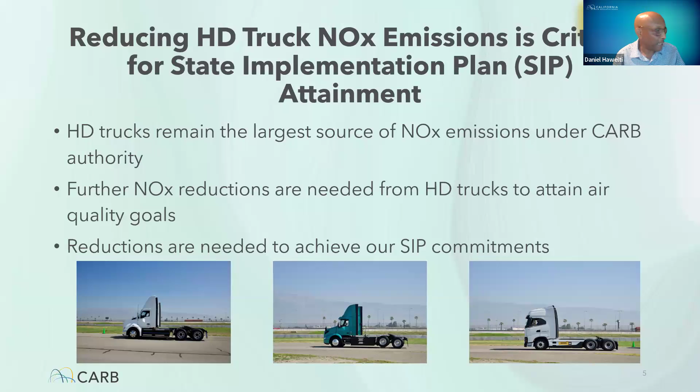The table shows a comparison of the major elements included in the Omnibus regulation and EPA's NOx rule. First, there is a difference in the applicability of the two regulations. The Omnibus applies to 2024 and later model year engines used in vehicles greater than 10,000 pounds, while EPA's NOx rule applies to 2027 and later model year heavy-duty engines used in vehicles greater than 8,500 pounds. Both regulations apply to spark-ignited and compression ignition heavy-duty engines.

Both regulations modify the same regulatory elements, including similar certification test cycles, and corresponding standards that are similar with slight differences. Both programs modify the averaging, banking, and trading program, the warranty period, and the useful life periods. Both regulations also modify the in-use testing program and use the moving average window methodology for analyzing emissions. Next slide.

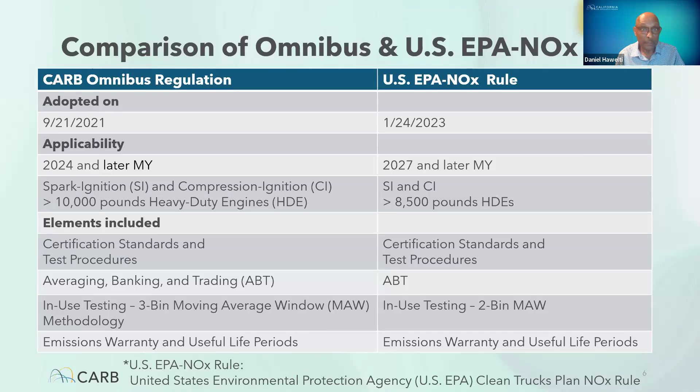In this workshop, in general, staff is proposing to largely align with the US EPA NOx rule for 2027 and later model years. However, CARB will maintain its own certification program, its own onboard diagnostic program, its own emission warranty information reporting program, and its own heavy-duty in-use testing program, except for aligning with EPA's two-bin moving average window methodology, as well as the off-cycle standards as agreed in the partnership.

CARB will also maintain its clean idle requirements as a mandatory requirement, as opposed to EPA's voluntary requirement. Next slide.

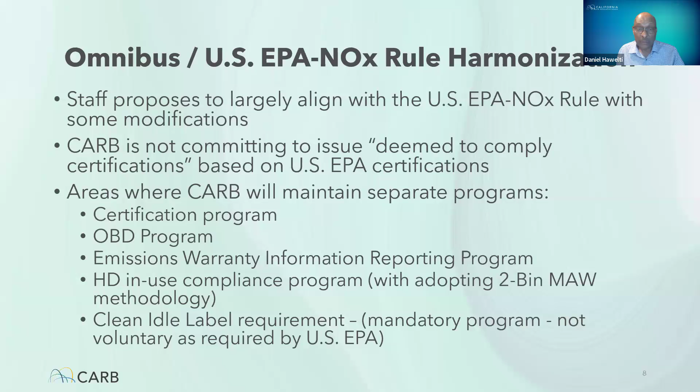Staff is proposing to align the Omnibus certification standards for 2027 and later model year engines with the federal certification standards for both compression ignition and spark ignition engines. For compression ignition engines, standards are based on existing certification test cycles such as the FTP and the SET, and a new low load cycle intended to address low load operations. For spark ignition engines, standards are based on the existing FTP duty cycle and a new SET duty cycle intended to address high load operations.

In addition to NOx, EPA also established reduced standards for particulate matter, hydrocarbons, and carbon monoxide. Staff is also proposing to align with these standards. Next slide.

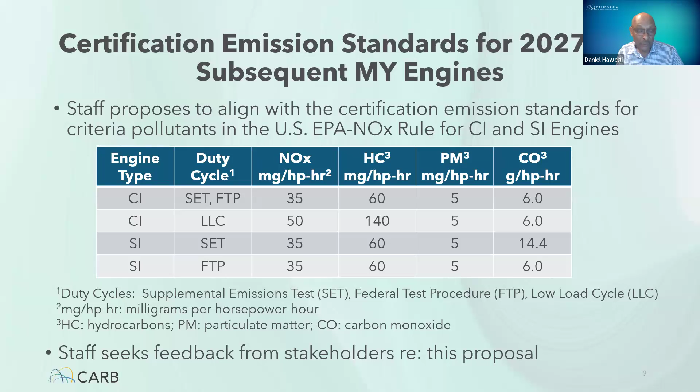Next is a durability demonstration program. Manufacturers are required to demonstrate that the engine and after-treatment system will meet applicable standards throughout their regulatory useful life. Staff is proposing to align with the durability demonstration provisions in the EPA rule.

This would include the method for determining deterioration factors for new engines, which would include dynamometer aging of the engine and after-treatment system for a fraction of the useful life, and accelerated bench aging of the after-treatment system for the remainder of the useful life.

Additionally, the program would require manufacturers to verify the deterioration factor, or DF, in use using engine dyno testing or portable emissions measurement system, or PEMS testing. Currently, Omnibus requires manufacturers to submit in-use emissions reports for DF verification. For 2027 and later model year engines, manufacturers would no longer be required to submit these in-use emissions reports. Next slide.

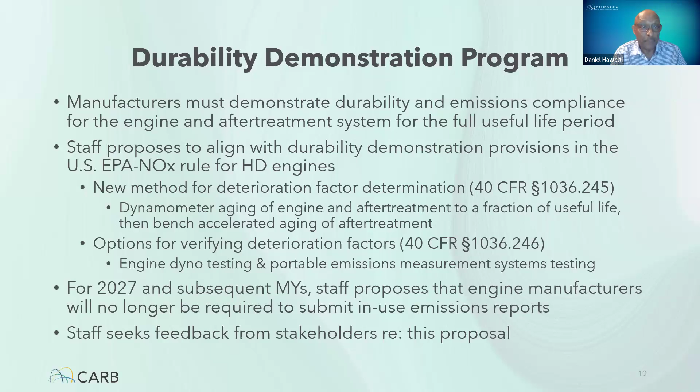The averaging, banking and trading program provides manufacturers with flexibility in their product planning, while also encouraging the early introduction of emission control technologies. Starting with the 2027 model year, staff is proposing to merge the California ABT program with the federal ABT program, and also allow the use of credits accrued under the federal ABT program to certify 50-state engine families in California. The proposed NOx family emission limit caps are 65 milligrams for model years 2027 through 2030, and 50 milligrams for model years 2031 and later. Additionally, credit accrual from zero emission powertrains would not be allowed for 2027 and later model year engines. Also, there would not be an ABT program for hydrocarbon, CO, or PM for 2027 plus model years. It means that for these pollutants, manufacturers have to certify to the standards.

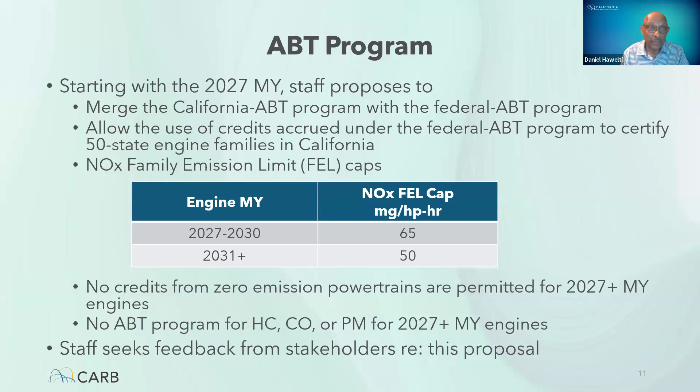Moving on to the useful life. The useful life period is the period for which the engine must remain emissions compliant. Staff is proposing to align with the useful life values for mileage, years, and hours in the federal NOx rule for 2027 and later model year engines. For heavy engines, the useful life, which is 650,000 miles shown in the table, is a period that the engine should remain compliant with the standards when the vehicle is operating in the real world. However, manufacturers are required to demonstrate durability at certification for a longer useful life of 750,000 miles, intended to ensure that the final standards will be met throughout the shorter useful life of 650,000 miles when these engines are operating in the real world.

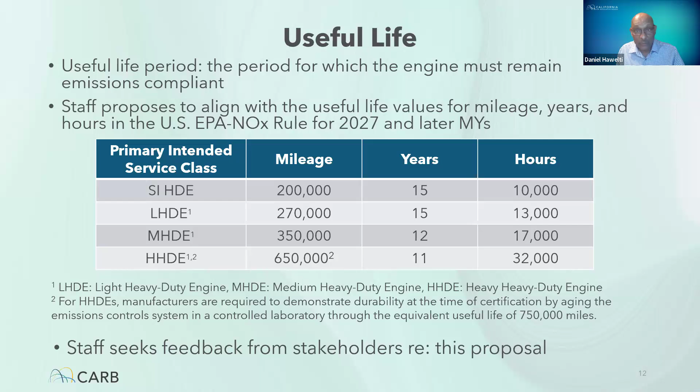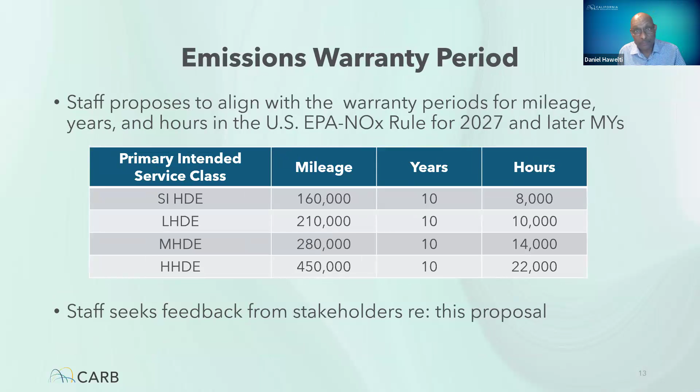Moving on to the in-use standards, staff is proposing to align with EPA's two-bin moving average window methodology and off-cycle standards for 2027 and later model year engines. Emissions are collected using PEMS when the vehicle is operated in use, and then analyzed using 300-second moving average windows each second. Window emissions are then placed into a bin depending on the type of operation. Bin 1 represents window emissions at idle or at very low load operations, and bin 2 represents window emissions for low, medium, and high load operations. Staff is also proposing to align with the PEMS accuracy margin, which is equal to 0.4 gram per hour for bin 1 and 5 milligram per horsepower hour for bin 2.

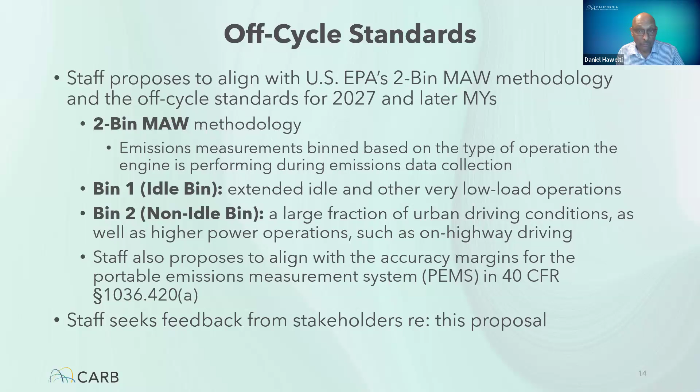Continuing with the in-use standards, staff is proposing to align with EPA's 15 milligram per horsepower hour interim compliance allowance applicable for bin 2 off-cycle standards for medium-heavy and heavy duty in-use engines. However, there are differences between CARB and EPA's applicability of the margin. For EPA, the interim compliance margin is permanent, applicable for 2027 and later model year engines. For CARB, the provision would sunset in 2035. This proposal is based on the partnership agreement signed between CARB and the industry.

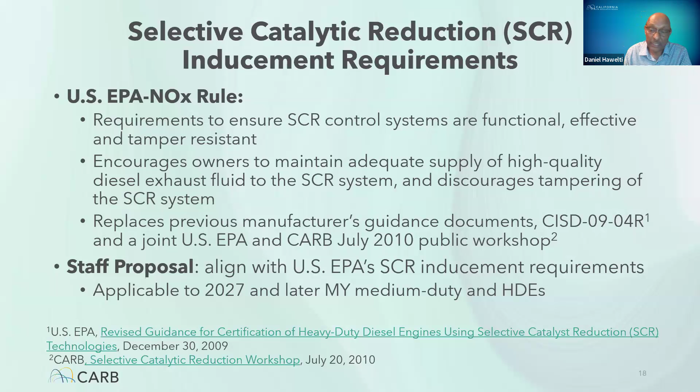Currently, California transit agencies can purchase transit buses equipped with federally certified engines instead of Omnibus compliant engines. Since CARB is proposing to align with the federal requirements starting with the 2027 model year, there would be no need for this exemption. As a result, staff is proposing to sunset this exemption starting with the 2027 model year engines. This concludes my presentation.

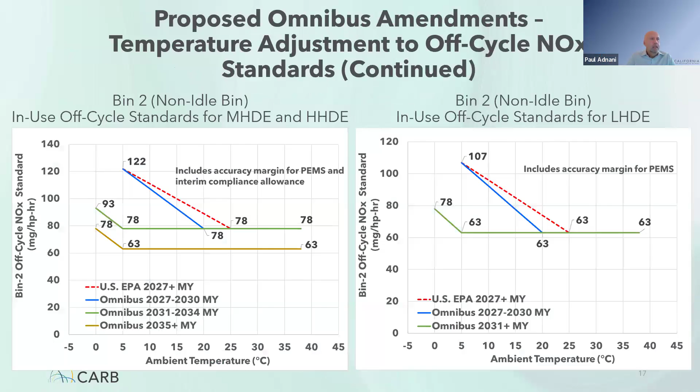Well, the question is, they're not very sensitive to temperature. Yes, until 20 degrees C, but after that, as you see, the standards do go up. And these are the ambient temperatures, by the way. So depending on what the average ambient temperature is for the test day, you're going to have a different set of standards. I'm just looking at the green line - go back to the previous one. It looks like between 5 to 0 degrees C, the standard goes up by almost 20%. So whether you want to call that very temperature sensitive or not, to me it is.

Thank you, Paul. Our next question comes from Tom Croissant. Will NZEVs broadly fit into the same emissions requirements as shown in the table, and enable potential hydrogen to ICE hybrid and/or natural gas RNG engines to still participate in ABT generated credits?

So first thing I want to say is that NZEV is not a term that is defined in Omnibus. I presume you're referring to hybrids. I can go through each one at a time. Hydrogen internal combustion engines - yes, whether they would fall under the spark ignition or compression ignition category, yes, they would be subject to the same emission standards that were shown to you. Same thing with natural gas and RNG. Hybrids, I guess, have various pathways - you could either certify the engine or certify the hybrid powertrain. But yeah, under those, they would be subject to the same standards that were shown to you.

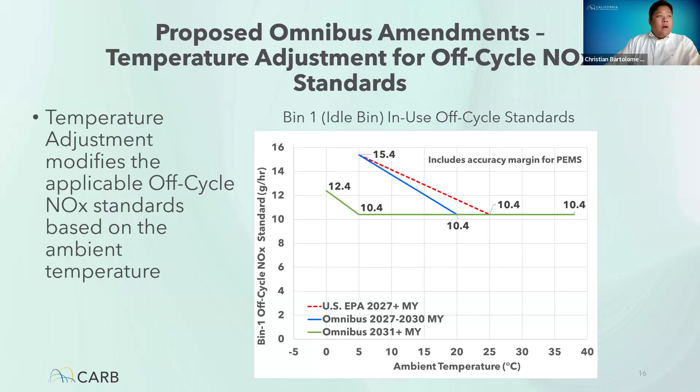Our next question is related to slide 15. Is slide 15 related to the off-cycle slide 14? Yes and no. They apply to in-use standards. The interim in-use compliance applies to off-cycle standards, but it also applies if you take an in-use engine, take it off the truck, and put it on a dyno in the lab. That is still considered an in-use engine, so the compliance allowance would apply to lab testing in that scenario as well.

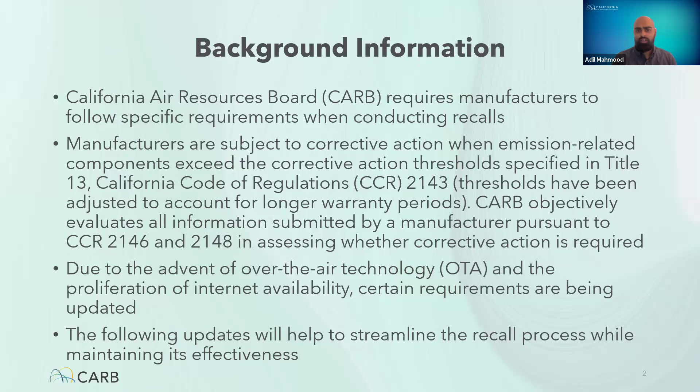Due to the advent of over-the-air technology and the proliferation of internet availability, certain requirements are being updated. In this presentation, I will go over updates to the requirements that will help streamline the recall process while maintaining its effectiveness.

The first update is to the recall repair label requirement, currently required by California Code of Regulations sections 2116, 2128, and 2169.3. These labels indicate that a recall repair has been made to an engine. Currently, manufacturers are required to affix a recall repair label to vehicles after a recall repair has been completed. If a vehicle is repaired over the air, manufacturers must mail a recall repair label along with instructions on how to affix it to the vehicle owner.

The proposed update will exempt manufacturers from the recall repair label requirement if certain conditions are met. First, the recall must only involve a software change, not hardware. Second, the manufacturer must keep a record of VINs for all vehicles inspected or repaired. Lastly, upon request from the executive officer, the manufacturer must provide information about running changes, field fixes, service campaigns, and recalls for any given VIN from all vehicles affected by the nonconformity. Engine serial numbers cannot be used in lieu of VINs, because the DMV system requires VINs for recall registration holds.

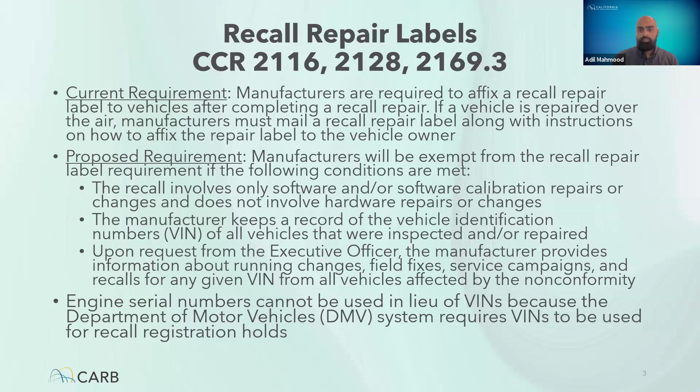Another update will be to the proof of correction certificate requirement. These certificates are provided to vehicle owners after a recall repair has been completed and can be used to have a recall registration hold removed by the DMV. Currently, for over-the-air recalls, during the first 6 months manufacturers must mail a hard copy proof of correction certificate or provide an electronic copy to owners who had the repair performed over the air. The proposed update removes this requirement during the first 6 months for over-the-air repairs. A hard copy must still be provided if the repair is performed after the first 6 months, because the DMV will not accept an electronic certificate to remove a registration hold.

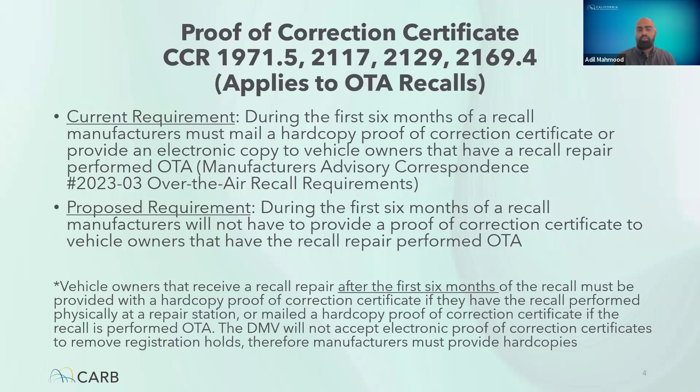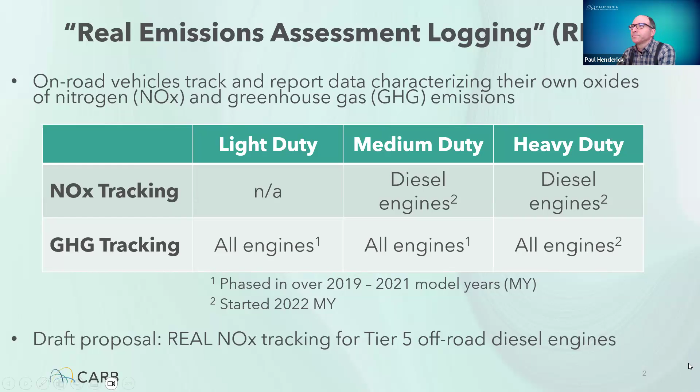What we're going to be focusing on from this point going forward is real NOx tracking. This is actually quite important. The data we get from it provides feedback on our regulatory programs as to how we're doing out there in the real world. It also improves our emissions inventory and serves as a quick screening tool to help flag any potential emissions issues that might be out there.

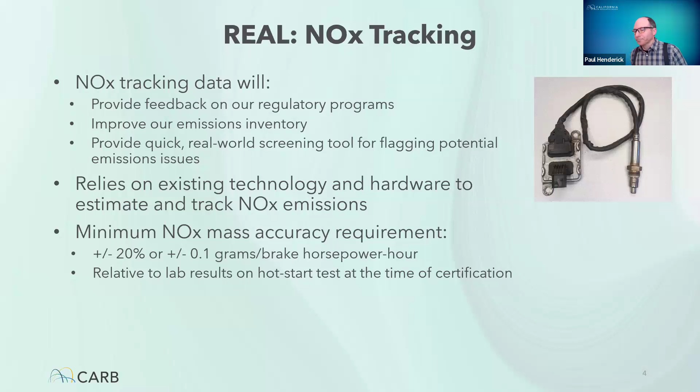We've got a couple of different time frames shown here. The 100-hour arrays capture data that's more current, like within the last 100 hours. The lifetime array is a continuously increasing quantity that represents, as the name suggests, the lifetime values.

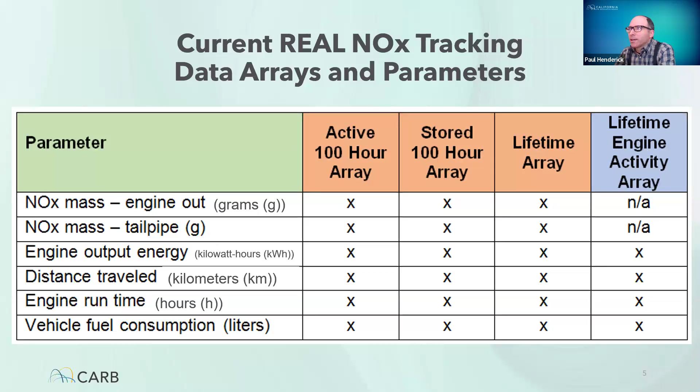These bins also get summed — the total of bin 2 through 14 is stored in bin 1. There are a few special bins off to the right: the not-to-exceed (NTE) bin, the regen bin (DPF regeneration bin), and the MIL-on bin. These store data under special circumstances.

When the not-to-exceed (NTE) conditions are satisfied, bin 15 stores data. When an active regen event is being commanded for the DPF, the regen bin stores data. When a malfunction has been detected by the OBD system and the MIL is illuminated, data is stored in bin 17, and not in the other bins. So if there's a malfunction, the data goes into that bin.

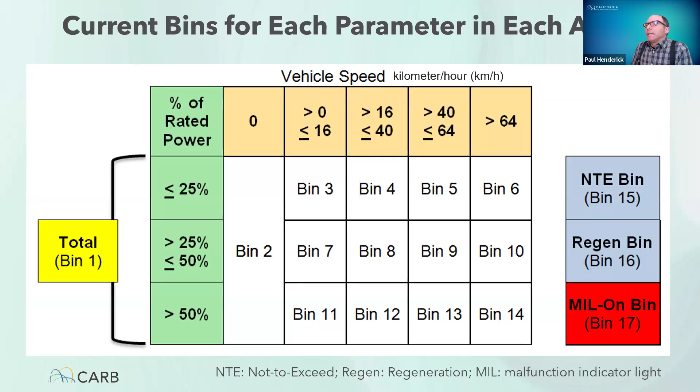Next slide, please. Okay, so that's basically what REAL looks like.

And as you saw, we do have an NTE bin in the current structure to reflect the previous in-use compliance evaluation method. But as mentioned previously, that has changed, and we want to keep up with those changes.

So the low NOx omnibus rulemaking moved from the NTE to the 3-bin moving average window methodology that allows for analysis of idle and low load and higher load operation.

But again, as part of the Clean Truck Partnership, we're agreeing to align with US EPA's methodology, which is only slightly different in this case. Instead of looking at 3 bins, it's 2 bins, both the idle and essentially non-idle operation.

So that's what we're proposing today, is to add these 2B-MAW bins to our REAL structure so that we're aligned. Next slide, please.

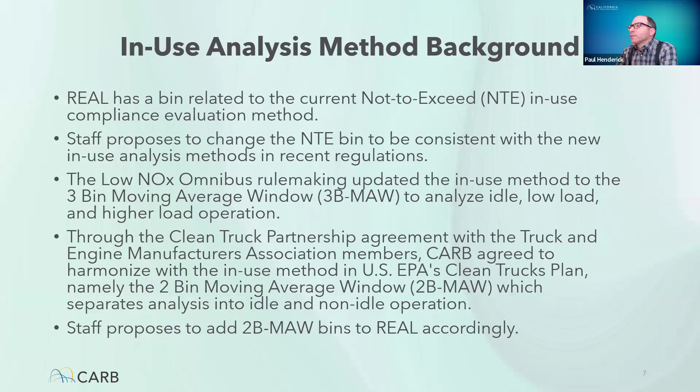Okay, so this slide is showing basically what I just described. So we're no longer going to be using the NTE bin for future engines, and we're going to add these 2B-MAW bins, bin A and B here.

Bin A, the idle bin. When your 300-second chunk of data averages to less than or equal to 6% of rated power, it would be put in bin A. But if the average rated power is greater than 6%, it would be stored into bin B.

I'll add that we want to work with the relevant SAE committees to standardize these changes. And next slide, please.

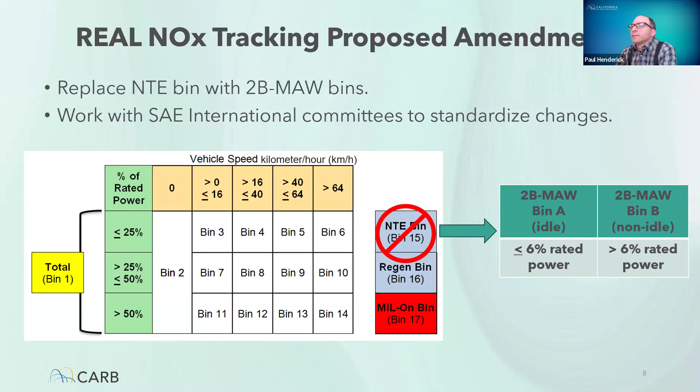One thing that we're sensitive to is the need to economize on the engine control module's resources in terms of memory and processing. And so we're proposing a targeted use of these 2 bins, A and B.

So bins A and B are there for the 100-hour arrays and the lifetime array. And for engine output energy, we would add bin B. That's where we need to get the work term to be able to calculate the gram per unit work values for bin B.

But bin A does not need work for that evaluation, and so we will only need to add bin A for the engine runtime. It's a grams per hour based standard. And then also we're adding bin B for engine runtime to give us a sense for how much time is being spent in one mode of operation versus another, A versus B.

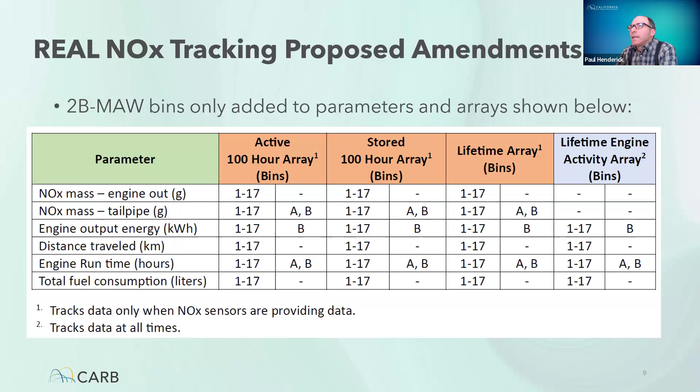Next slide, please. So the goal here, when incorporating 2B-MAW into REAL, is we want to use a methodology that's as close as possible to the methodology that's used when post-processing PEMS data in the actual in-use compliance evaluation method.

So data would be deemed invalid and therefore not included in a 300-second window if REAL tracking is paused for some reason, such as a malfunction detected with the tailpipe NOx sensor, or if the MIL is on for, generally speaking, other types of malfunctions as well. And also if the NOx sensor controller is indicating that the reading is not stable, that could be another reason to not include data in this window.

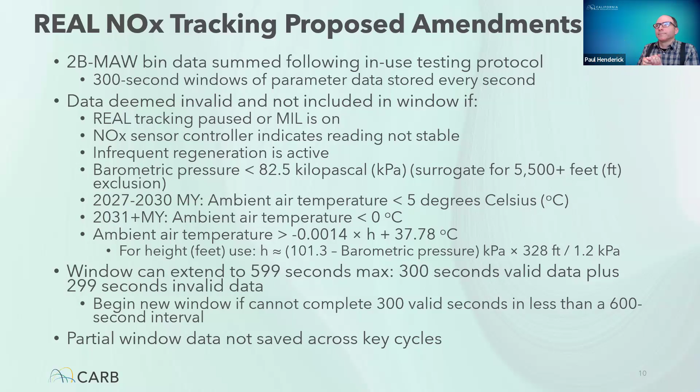And then the second bullet point relates to the 2B-MAW window methodology, basically what I was going over in the previous slide—in the sense that we want to align the methodology employed by the engine control module that's tracking 2B-MAW data as closely as possible with the method used when post-processing PEMS collected data. So we showed you our stab at it, trying to get close, and we'd like to hear your feedback on if there's some area where it can be improved. We'd like to have that discussion. So that is it for me, Christian.

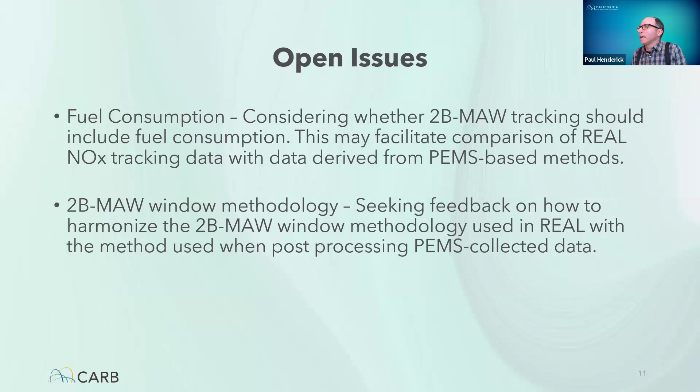I believe Paul wanted to answer. Yeah, that's correct, it is pretty high. Really, those original accuracy requirements were a reflection of older model year engine data, meant to simply reflect, without making any special effort to meet a standard, what trucks would be able to comply with, sort of to keep the performance and accuracy at least what it appeared to be capable of a few years ago.

So, like I said before, we're going to continue to look at data as we get more, to see if we can reevaluate that for future engines. Thank you, okay.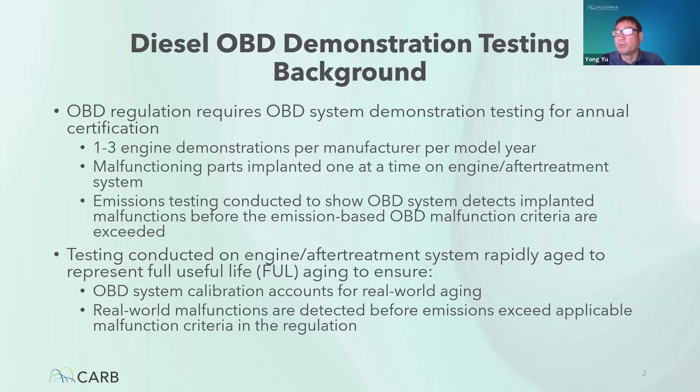Here are the requirements for the complete engine aftertreatment system aging. First, the OBD regulation sets the minimum accelerated aging hours for the complete system, including engine emission controls and aftertreatment. For heavy-duty engines, the minimum hours will be 2,500 hours.

For medium heavy-duty engines, 1,063 hours. For light heavy-duty engines, 632 hours. For the aging process, it must consider the following parameters: operation at rated horsepower, operation at load level greater than 80% of rated torque, with sustained interval at 100% of rated torque.

Operation at transient conditions, for example Mode 2 of the Federal Test Procedure cycle. Calculate the number of regeneration events experienced over the FUL. Thermal cycle events, which means system shutdown with subsequent cold start.

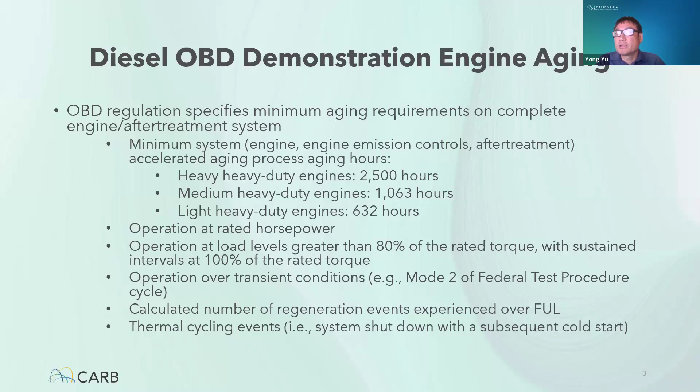Next slide. In addition, the regulation also requires validation of the OBD demonstration engine aging process against an actual FUL in-use engine, to ensure this aging process is representative.

Validation must include the following metrics of the FUL: fuel burn rate, total fuel consumed, and reductant used by the system. The validation also includes the correlation between a representative actual FUL system and the test engine's adaptation learning parameters used to maintain emission control performance to the applicable emission certification standard over the life of the system. Next slide, please.

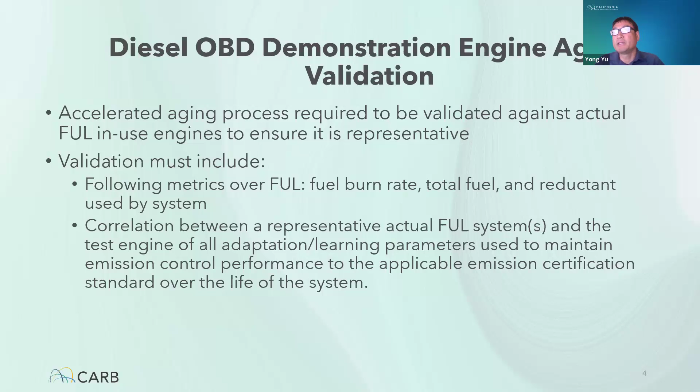US EPA and CARB have emission certification engine aging protocols, but they serve a different primary purpose than OBD demonstration testing. The aging and deterioration factor is used to ensure the engine will meet emission standards throughout the useful life.

The difference between US EPA aging versus CARB's OBD demonstration aging includes the fewer hours of aging on a complete system, meaning engine plus after-treatment for heavy-duty engines. The US EPA DF aging allows accelerated bench aging for the after-treatment device, including accelerated chemical exposure, including lube oil and sulfur.

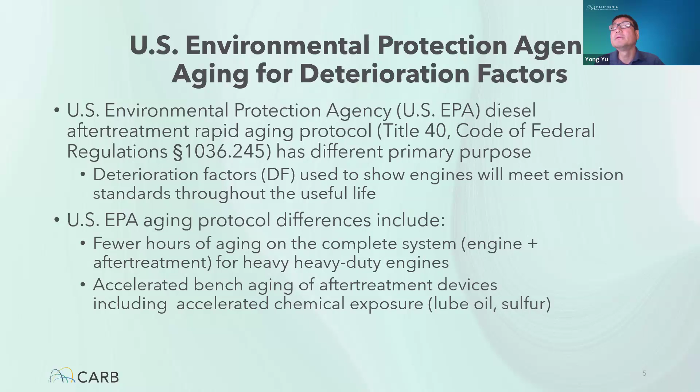Next slide. At the end of this presentation, I want to explore opportunities to preserve representative OBD demonstration and harmonize between the OBD aging and the DF aging.

We're seeking feedback on the following: first, how the engine and emission control adaptation parameter values compare between the US EPA aging protocol versus CARB's OBD protocol, for instance the amount of available authority used up in adaptation. Second, the impact of the aging protocol difference on OBD system performance. Third, the parts of this protocol that can be harmonized without compromising OBD performance.

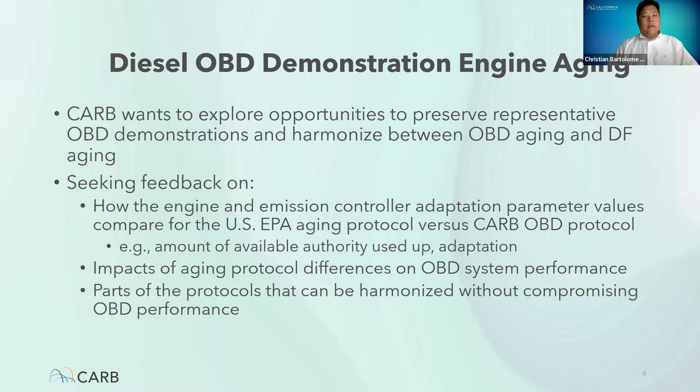I'm not seeing any questions in the queue, but we still have time for Q&A on OBD. I'll start transitioning the slides to our final presentation, but if there are any more questions on OBD, feel free to ask now and we can still get to them. Okay, I'm still not seeing any questions on OBD, so maybe now's a good time to transition to our last presentation.

And that's going to be the Omnibus Amendments Manufacturer In-Use Testing Program by Thomas Montes.

Okay, can you hear me okay? We can hear you, Tom. Okay. Good morning or good afternoon, depending on where you are. My name is Thomas Montes. I'm the branch chief over in-use programs with CARB. And today I'll be talking about the Omnibus amendments relative to heavy-duty in-use testing.

Next slide, please. Among the in-use test program discrepancies between US EPA's CTP and CARB's Omnibus regulations, CARB staff are proposing to align with EPA's rule with a few exceptions outlined below. First, regarding the use of commercially available biodiesel fuel for in-use testing, CARB is proposing to hang on to that as it is found in the Omnibus regulation. Second, the compliance determination based on the number of pass-fail tests, in addition to the sum over sum emissions, when 3 or more vehicles fail for the same pollutant in the same bin, as found in the Omnibus regulation. And lastly, we are proposing the use of the PEMS system or the chassis dynamometer for in-use compliance testing to verify idle emissions for the Omnibus regulation.

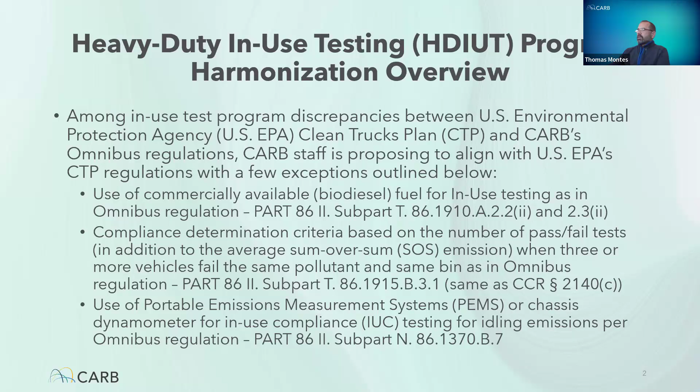Next slide. Here we just have a cleaned up table with the same 3 proposed amendments that I just outlined, with citations on the right for easy reference.

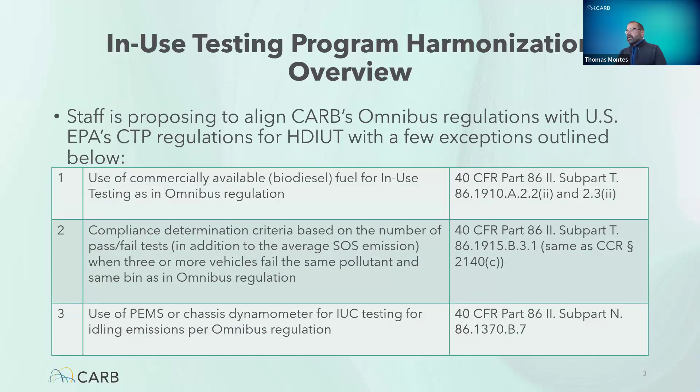Okay, next slide, Christian. So let's start off with the biofuel proposed amendment. EPA understands that manufacturers have little control over the quality of fuel over the years of in-use operation, and CARB staff believe the in-use testing program is intended to reflect real-world emissions with real-world fuel. Our current analysis of commercially available biodiesel fuel does not indicate any concerns with fuel contaminants that would harm or otherwise degrade the engine's emission control system, which we understand EPA agrees with in part. And we also want to ensure manufacturers do not prohibit the use of CARB-approved commercial fuel in a statement in the manufacturer's maintenance instructions in the owner's manual, nor deny warranty based on the use of such fuels.

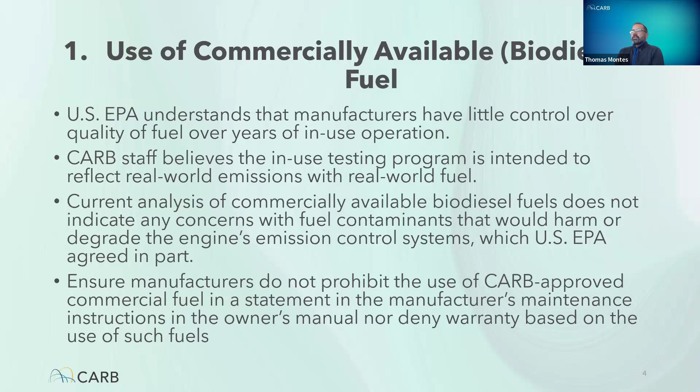Next slide, please. And here we have just outlined the comparison with the EPA rule on the left, stating the use of biofuel relative to testing. You see that in the bottom half on the left slide, it states that fuel that is not allowed or otherwise indicated as unacceptable fuel in the operator's manual. But on the right, we have CARB's proposed language, which mentions that CARB may use any commercially available biodiesel fuel blend for in-use testing. And on the bottom right, it states once again, relative to in-use testing, you may drain the fuel tank and refill prior to testing with diesel fuel conforming to ASTM D975 or commercially available biodiesel fuel.

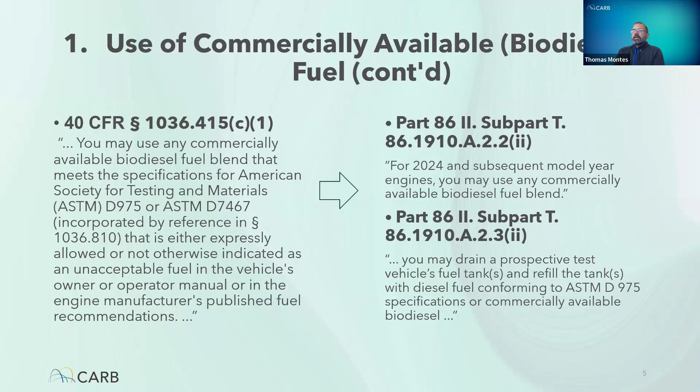Okay, next slide, please. And the second proposal deals with the pass-fail criteria for in-use testing. And to begin with, when 2 or more engines do not comply with off-cycle bin standards, the US EPA CTP requires 10 engines to be tested. And when 10 engines are tested, the compliance determination for EPA CTP is based on the arithmetic mean of the bin emissions from these 10 engine tests for each pollutant.

Now, CARB's proposal will add the following criteria for pass-fail determination of an engine family. And that is specifically if 3 or more engines do not comply with the off-cycle bin standards for the same pollutant in the same bin, the tested engine family would be determined non-compliant. So we feel this would protect against outlier data points that may pull the engine family average down. And in addition, we feel if we see 3 out of 10 in-use engines with high emissions, that's an indication of more of a chronic in-use emissions control defect that needs to be addressed. That could be 30% or more of the in-use population. And that's something CARB would like to take a look at further, hence the basis for our proposal to update the pass-fail criteria.

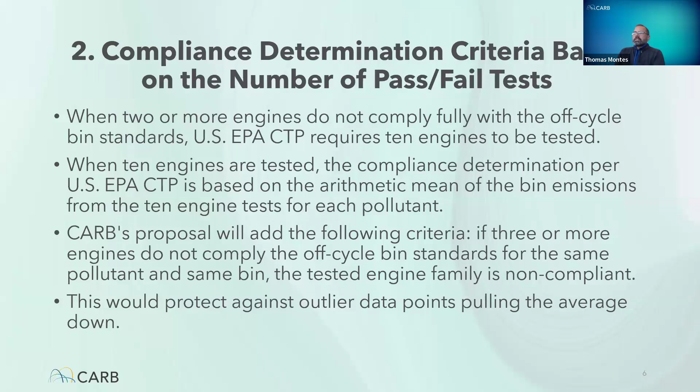Next slide, please. Here again we have, for ease of reference, EPA's CTP rule on the left, which discusses calculation of the arithmetic mean of bin emissions to determine pass or fail. On the right is CARB's proposed language in Part 86, which states that if the sum over sum emissions of the same pollutant and same bin exceed the in-use threshold for 3 or more tests, this would be deemed non-compliant.

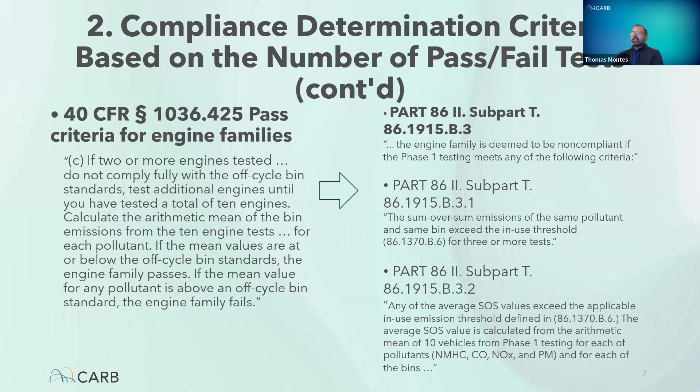Next slide, please. Here's the last proposal, regarding the use of PEMS or a chassis dynamometer to verify idle emissions. The US CTP requirements allow heavy-duty diesel engines to be optionally certified to the clean idle NOx emission standard of 30 grams per hour for model years 24 through 26, and 10 grams per hour for model years 27 and later. The US EPA CTP procedures are based on engine dynamometer testing. However, CARB's proposal would add a provision to allow the use of PEMS or chassis dynamometer for in-use compliance testing and verification of idle emissions.

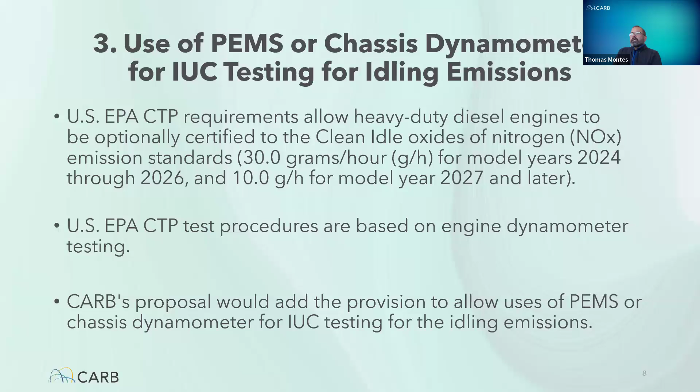Next slide, please. In a similar format, we have EPA's existing CTP language on the left, and on the right CARB's proposed language in Part 86, which states at the bottom that in-use compliance emission testing may be conducted using a chassis dynamometer in the laboratory or using an onboard PEMS system. I think that brings me to the end of my slides.

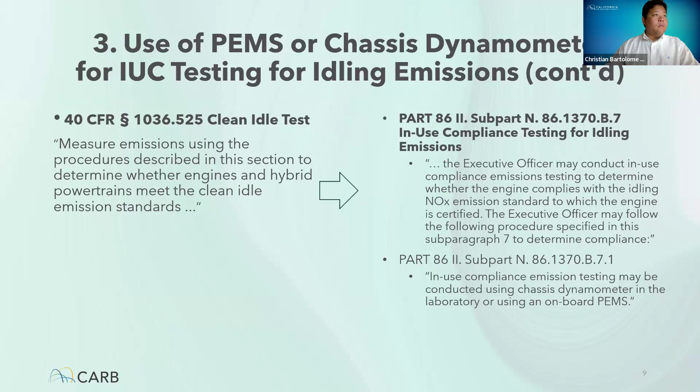Well, thank you, Tom. I'd like at this time to open up the questions for any of the presentations we had today, whether it's the alignment topics, EWI, OBD, or in-use again. Feel free to use the Q&A feature within Zoom or the raise hand option if you'd like to ask a question verbally. I currently don't see any questions, but we'll still stand by for any questions on any of the topics today.

Okay, we have a question from Steve Berry. Steve Berry asked, not sure if someone asked, but is CARB adopting the interim in-use testing pass-fail provisions for 2027 and 2028? Paul, can you help with that?

Yeah, I can take that one, Tom. You may not be familiar with those. So I think the pass-fail criteria, Tom's presentation indicates that we're thinking of a different pass-fail criteria. So those interim provisions would also be part of the conversations that we would like to have with the stakeholders. Thank you.

Don't have any questions in the queue or hands raised. Participants are welcome to ask away. Yeah, I don't see any additional questions in the queue or hands raised. Maybe we should move on to our next steps slide. Start sharing.